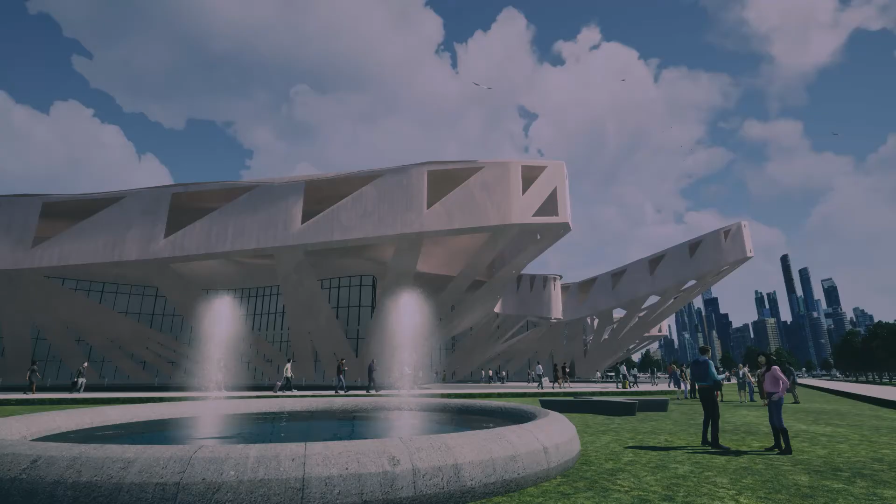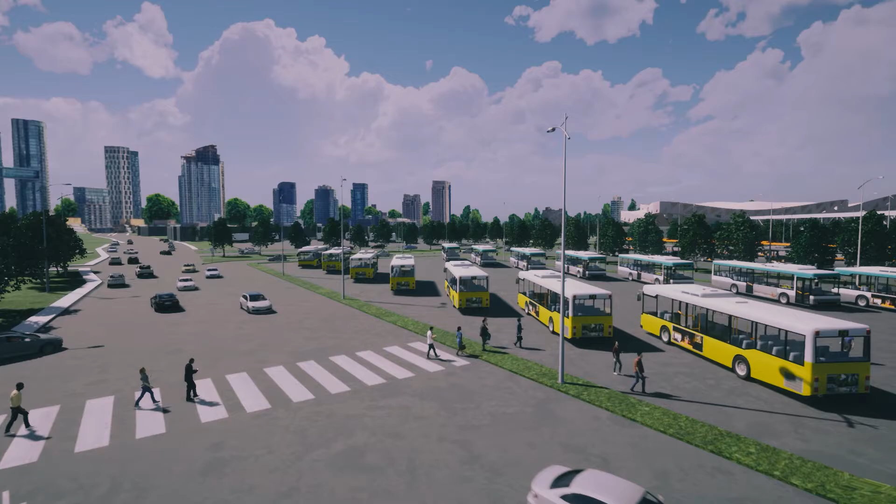Dagasa is designed and conceptualized as a seaport terminal, which prioritizes movement in design, focusing on how it can blur the boundaries between the sea and the city. This new seaport will serve as a multifunctional space, promoting the culture in the area, while it will also cater various activities for the public. The project's key goal is to develop the existing terminal, considering its efficiency and the overall design and planning aspects.

Batangas International Port is located in Barangay Santa Clara, Batangas City, which has a total area of 252,027 square meters. The existing location has wide access to different islands and provinces, particularly in the Calabarzon region of the Philippines. Site analysis is conducted to further understand the characteristics and charms of the site. This helps the designers to further understand and program the activities in and out of the structure with efficient movement of people and cargo in mind.

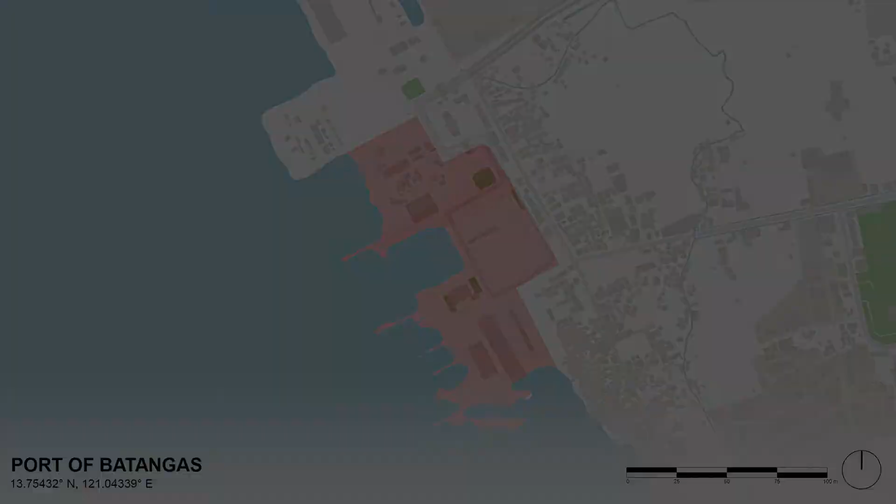The site is easily accessible from the major roads such as the National Highway Road and Diversion Road, which are both conveniently linked to the Star Tollway, being the main access road from Metro Manila and other South Luzon provinces, leading directly to the port area. It also has wide access to a variety of spaces wherein it is bounded with mostly residential properties and commercial spaces, and are also near local landmarks in the area.

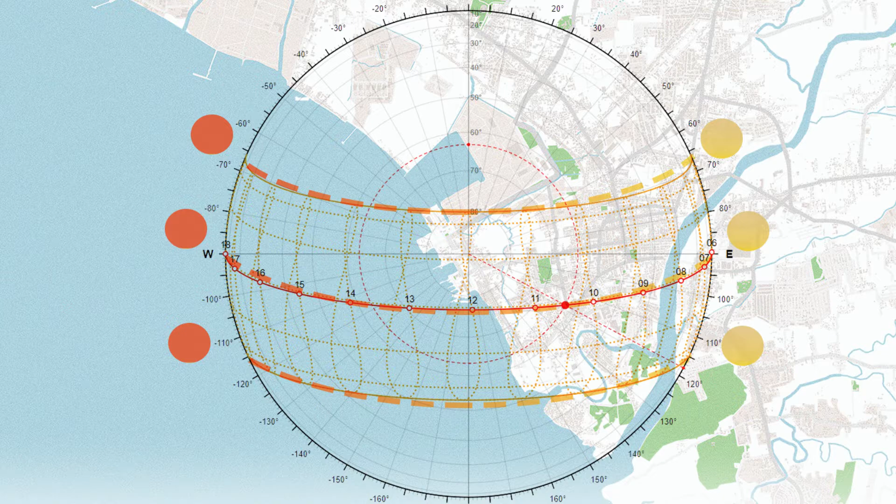The site traffic is also plotted, focusing on the pedestrian, cargo, and vehicular traffic within the existing Batangas port area. These help us in determining the existing movement of people and other elements present in the site for easier planning. Other analyses were made such as environmental analysis, plotting the sun and wind paths. Psychogeographic analysis was also conducted and plotted. The radius of the noise level around the site was also presented in the study for audio analysis within the site. These would be important in the latter part of the design phases to determine the flow of spaces within the Dagasa International Port. Strengths, weaknesses, opportunities, and threats were also thought of.

First, we start with the strengths of the site based on our analysis. The site is accessible to different provinces and has a wide access to public transportation and nearby terminals around the site. It is accessible to Batangas Port through Skyway, SLEX, Starlink, and Star. The Port of Batangas can help ease congestion at the Port of Manila, and it serves as an alternative international gateway for shippers based in Calabarzon. It is the country's largest domestic port in terms of passenger traffic, and it serves as the primary trade gateway between mainland Luzon and Mimaropa.

While acting as an important staging area for container-based domestic trade between Luzon, Visayas, and Mindanao. As for the weaknesses, first, the existing site and port has minimal commercial spaces on the port and has less spaces for waiting and boarding passengers. The site has less space for personnel and lacks access roads to the international ports due to traffic congestion. Truck ban alleviates traffic congestion, causing disruption in chain movements.

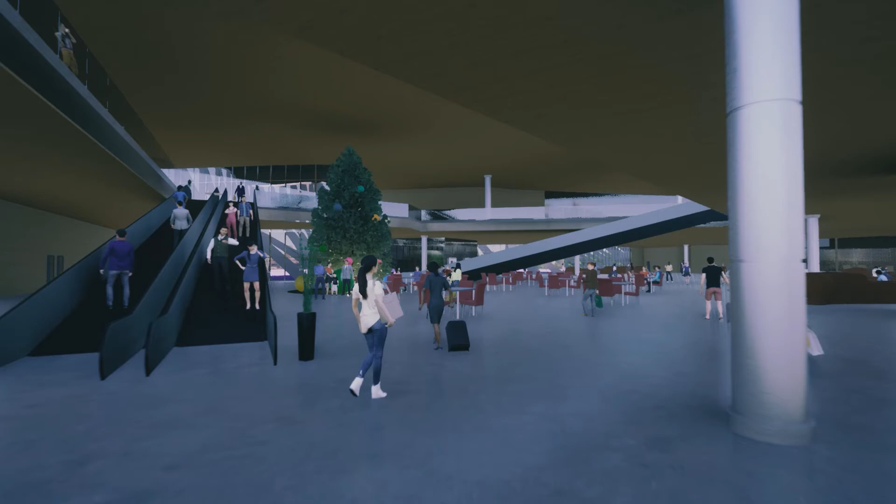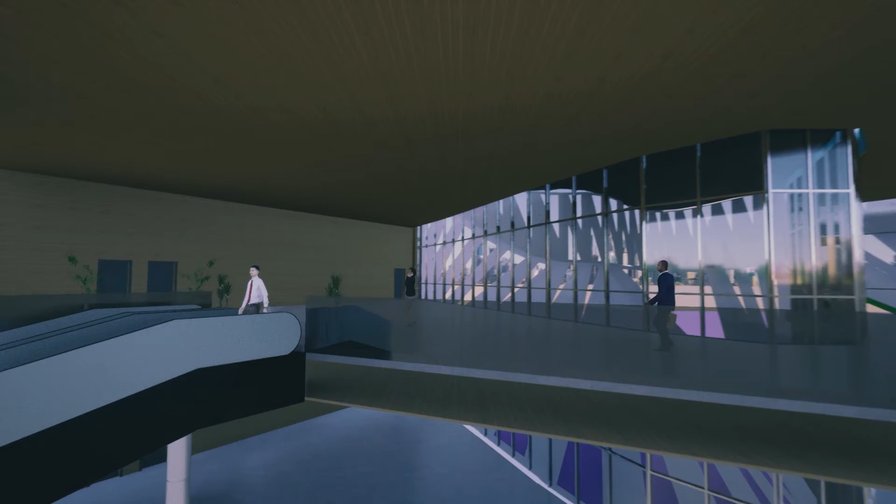Just like the Batangueño word, Dagasa, this is the fast-paced yet graceful movement, just like the movement of water. Our goal is to design and conceptualize a seaport which prioritizes movement and design through humans and automobiles or ships, etc. With this redesign proposal for Batangas Seaport, Dagasa's goal is to accommodate small and large vessels, introduce various spaces that promote culture in the area, areas accessible to everyone to rouse the interest of the people visiting the port, and address all the design considerations mentioned.

This project will focus on these four key objectives in order to develop the existing seaport infrastructure into a more globally competitive design terminal, considering its sustainability, connectivity, and convenience for the people. First, function.

To redesign the Batangas port and accommodate and introduce innovative spaces in the area through architecture. Second, character: utilize the advantage of the previous analysis in the Batangas port area. Third, experience: create an environment that enhances the experience true to the Batangas culture. Fourth, aesthetics: create a structure that is both unique yet faithfully local to the area's surroundings.

Our design objectives revolve around the redevelopment of the site in response to the new normal by providing more open spaces to promote safe distancing, reconnecting the sea to the neighboring towns by providing more public spaces and facilities at the port area, and using vernacular materials to promote the area.

To integrate a climate-responsive design, maximizing sun path and promoting natural lighting. Next, we plan to dedicate spaces for passengers and personnel by providing ample shades and commercial and even non-commercial spaces in the port.

Next, we introduce our design considerations, namely natural ventilation, health and safety abiding designs, accessible design considerations, environmental sustainability, and lastly the layout and composition of spaces within the new seaport of Batangas.

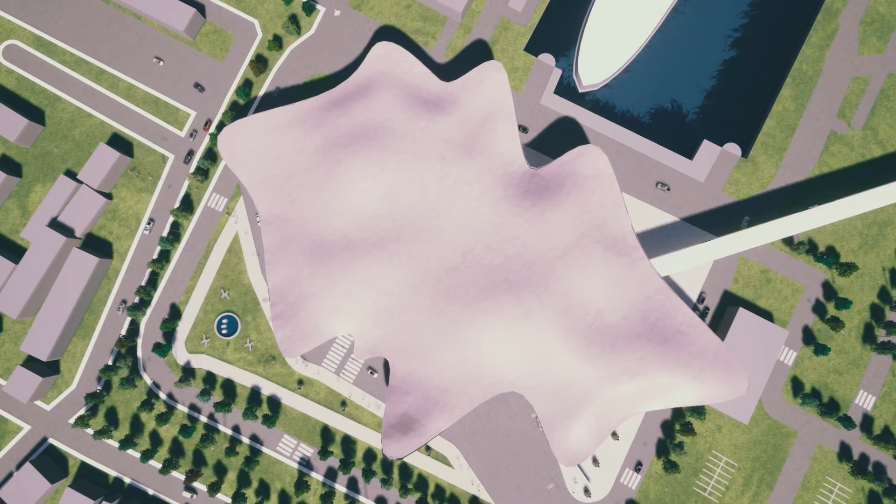The concept behind the Dagasa started with the idea of utilizing the site's soundscapes to strengthen the relationship between the people and their surroundings. The composition is based on the sound waves from the port's sea waves and its neighboring town, which provide a site-specific character to the design.

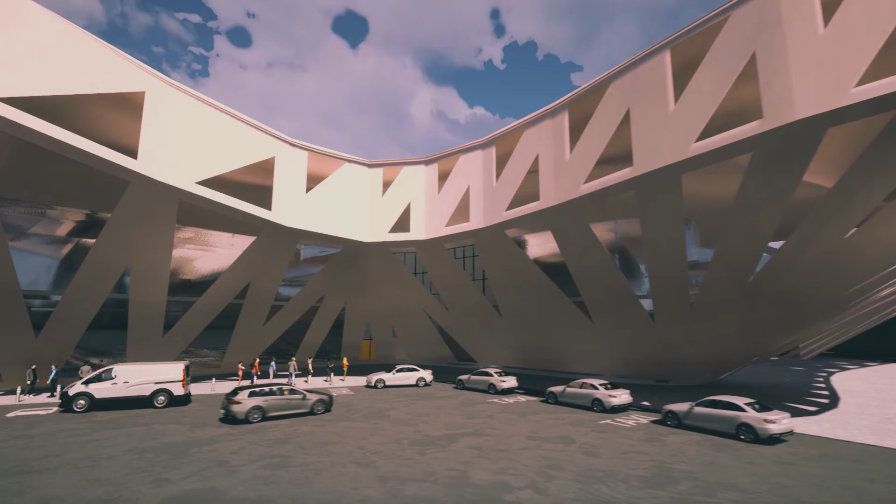With the idea of combining the morphologies, it allows the structure to reflect how the design can blur the boundaries between the sea and the city.

Photocatalytic concrete is used as part of the innovative materials to utilize in Dagasa International Port. According to research, this is a self-cleaning concrete material coated with titanium dioxide, which can help remove air pollutants while providing clean air in the town.

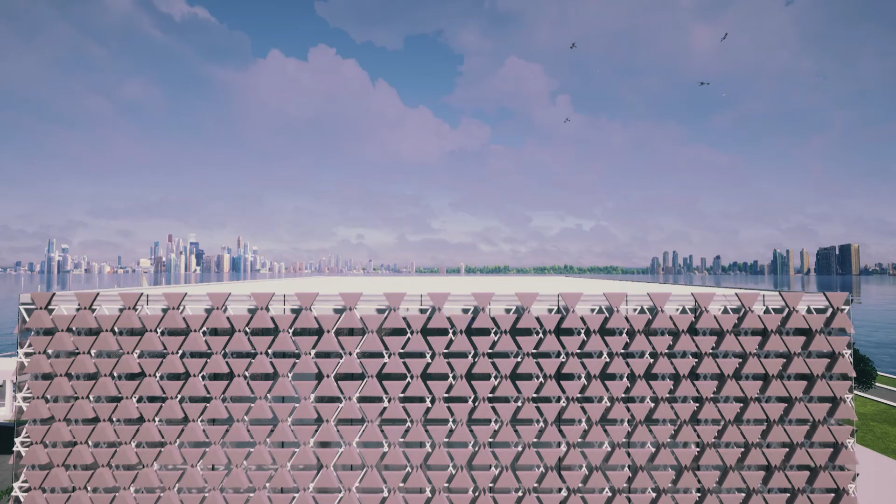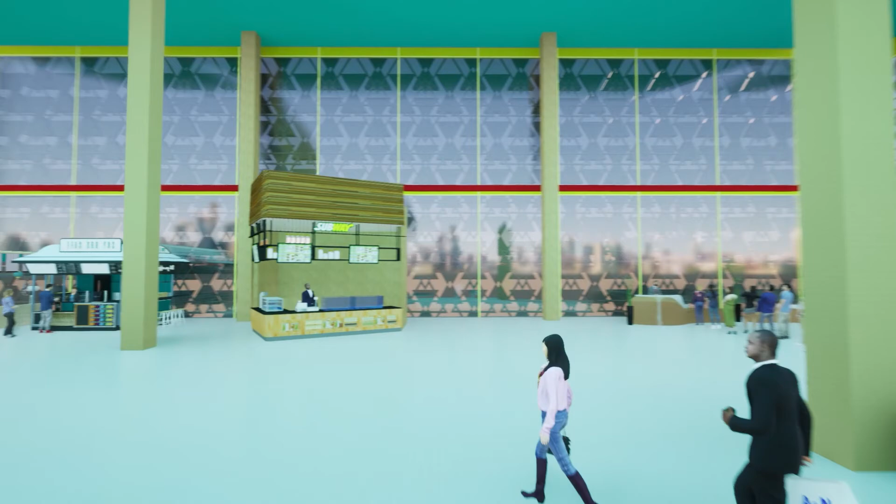We will also use fiber-reinforced polymer due to its high-strength materiality compared to traditional materials. It also has efficient characteristics such as corrosion resistance, UV resistance, and thermal mechanical properties. Fiber-reinforced polymer can also be used as a structural domain because of its capacity to withhold weight, and can be used as a structural member in retaining walls and bridge decks.

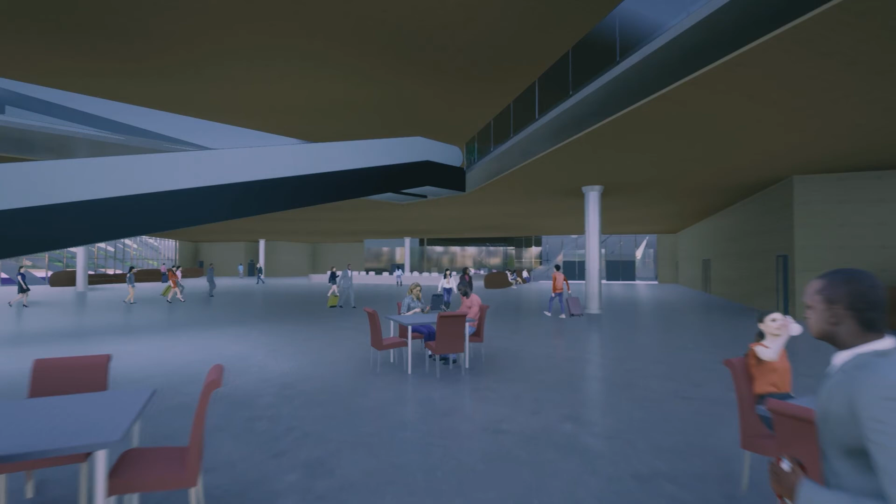To add character and texture with sensibility in our interiors, we will use sawali, a type of traditional woven split bamboo mats used as walls, paneling, or wall cladding in the Philippines. This promotes airflow when placed into the right spaces and use of vernacular materials.

And lastly, low-E glass, insulating and UV protection, and does not retain much condensation.

Focusing on the idea of the soundscapes, being a multi-layered single field recording could already bring a lot of context about the site. Integrating the site's soundscape to the composition, the form was conceptualized by combining the morphological structure of the sound waves from the sea and the city.

Incorporated with a series of curves representing the change in the wavelength of the sound waves, it also gives definition to the exteriority of the structure.

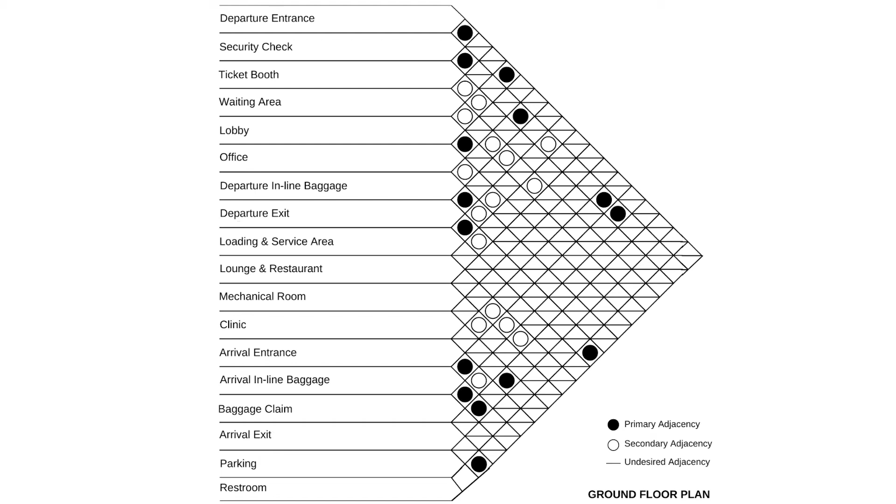Atelier A arrived at the classification of the required spaces, which are deemed suitable for the proposed Batangas port building, shown through a space matrix diagram. This diagram shows the primary, secondary, and undesired adjacency of the proposed spaces within the proposed Batangas port.

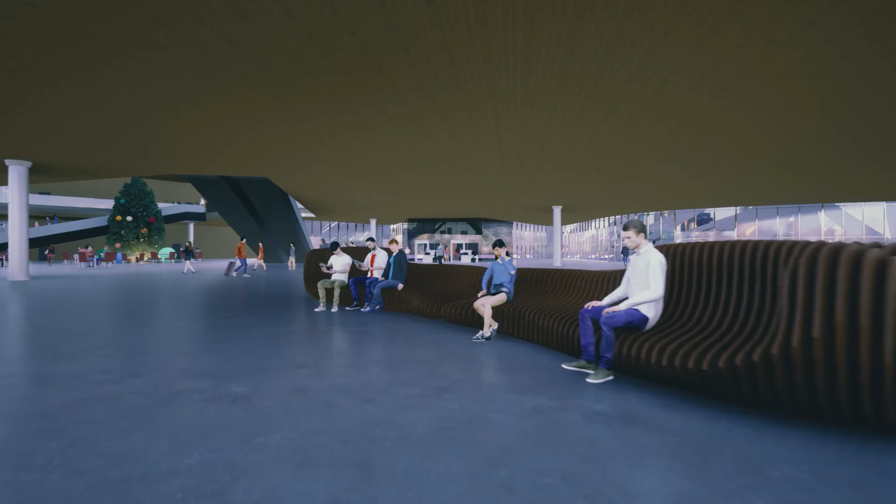The space matrix puts emphasis on the easy access of ingress and egress of passengers for the floor plan. This is to mitigate the possibility of contagious disease such as COVID-19 and to create an efficient foot traffic within the port area.

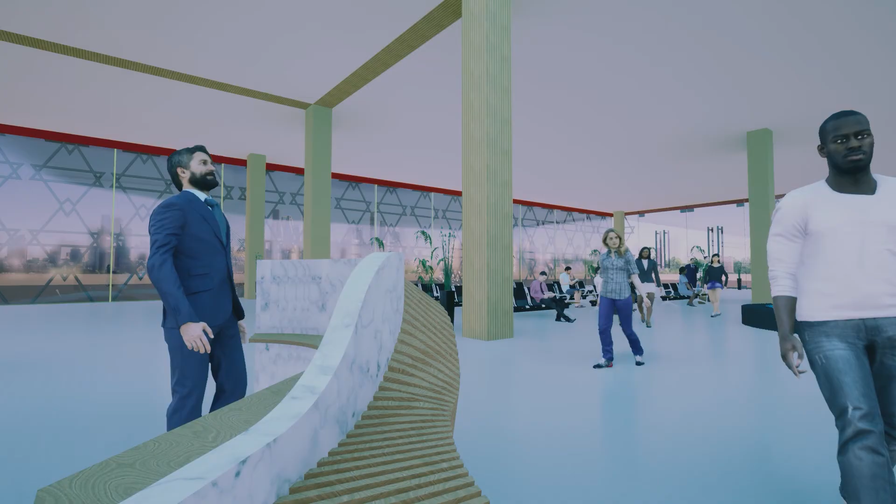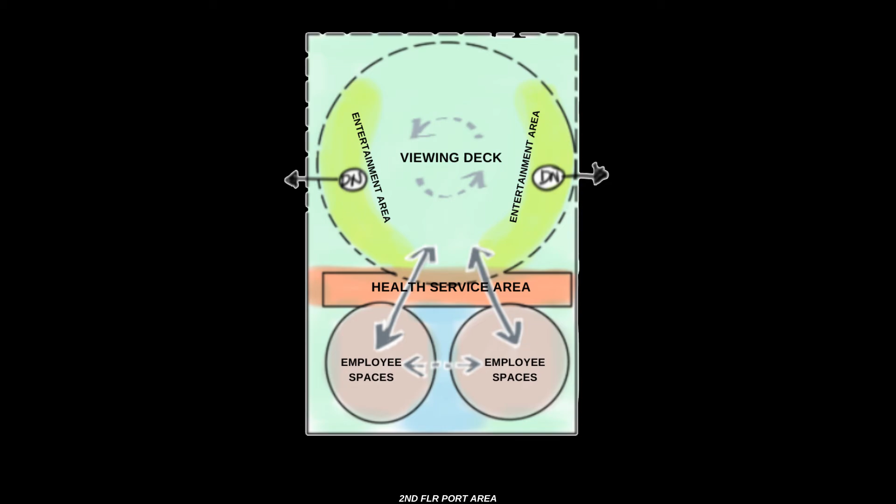Bubble diagrams are essential for the planners to determine the essential spaces needed for the proposal of the Batangas port. In this bubble diagram, the researchers illustrate the relationship between different spaces. This space planning gives opportunities for open and semi-open spaces to minimize contact and promote social safe distancing in compliance with the IATF guidelines. Other spaces would be further elaborated as the design phase progresses.

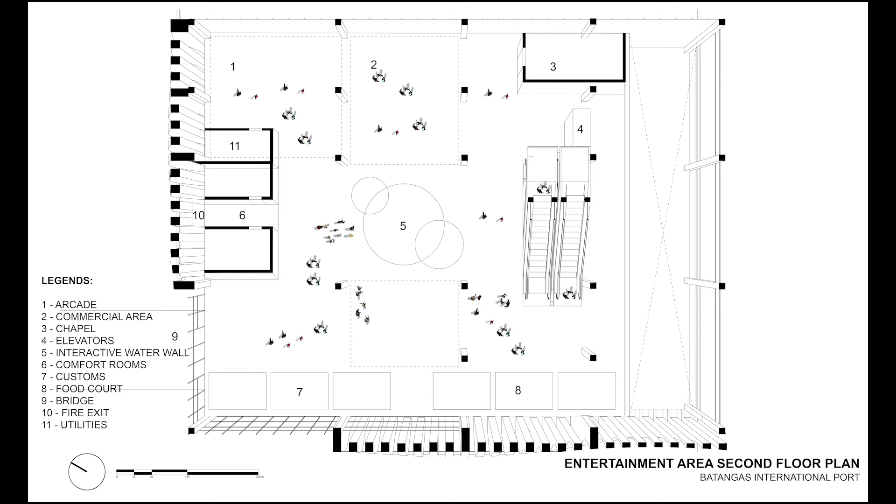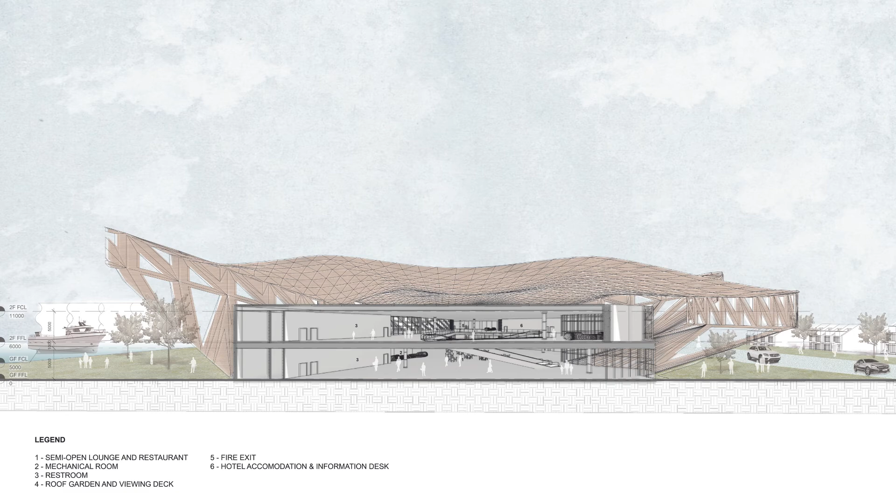The Dagasa port area is composed of 2 floors. For the ground floor, we have a total of 18 spaces dedicated to accommodate the boarding and unboarding passengers from the RORO area. One of the main features of the ground floor area is the semi-open lounge area for additional seating, and this area allows natural air to flow through inside the spaces of the Dagasa as part of our natural ventilation strategy.

Another main feature of the ground floor plan are the sanitation areas, strategically placed at entry points that have high exposure, adding ample open spaces. These are included in the new plans as part of the pandemic resilience strategies.

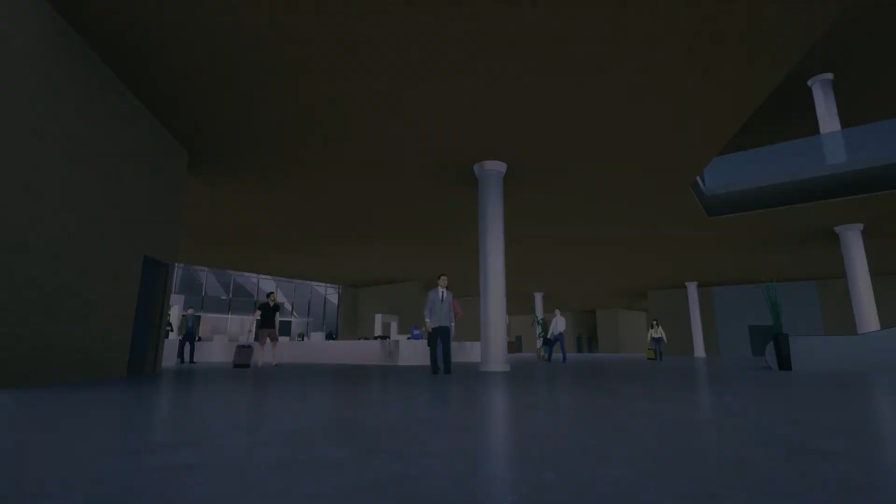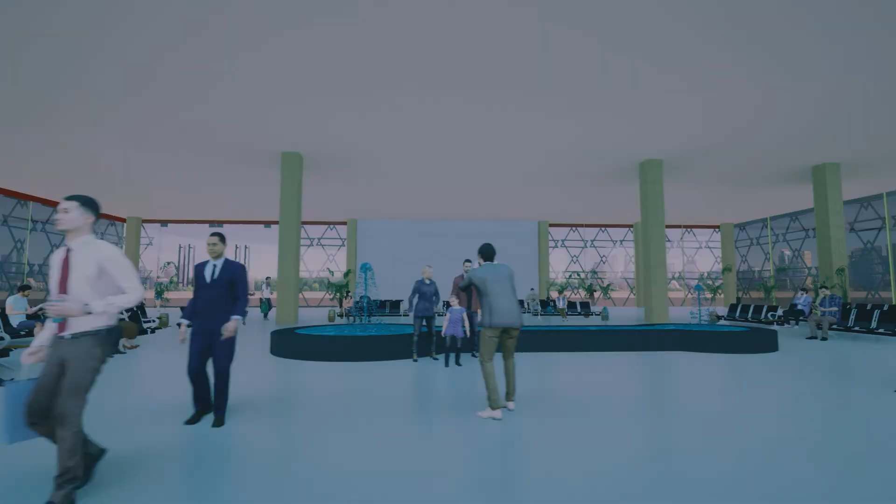Meanwhile, the Dagasa hotel and accommodations is connected to the second floor area of Dagasa International Port. It is composed of 3 floors: the ground terminal area, entertainment floor, and lastly the capsule hotel.

The Dagasa Hotel and Accommodation offers the capsule hotel, with the advantage that they are small and people put their belongings in lockers, which ensures that all rooms in the hotel remain fairly clean, which separates the Dagasa Hotel and Accommodations from the rest.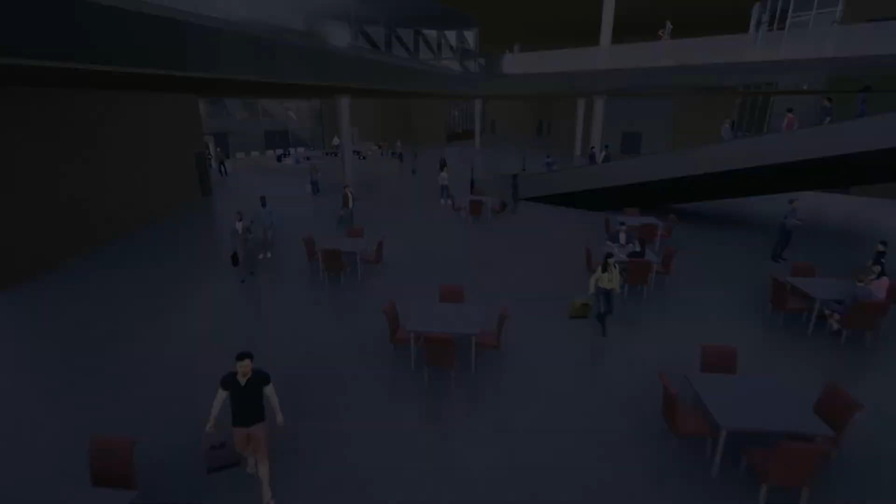All of the spaces and the floor plans were conceived under the requirements of the following: National Building Codes PD 1096, Fire Code of the Philippines RA 9514, the Philippine Green Building Code, Plumbing Code of the Philippines, IATF Guidelines, and lastly Batangas City Ordinances.

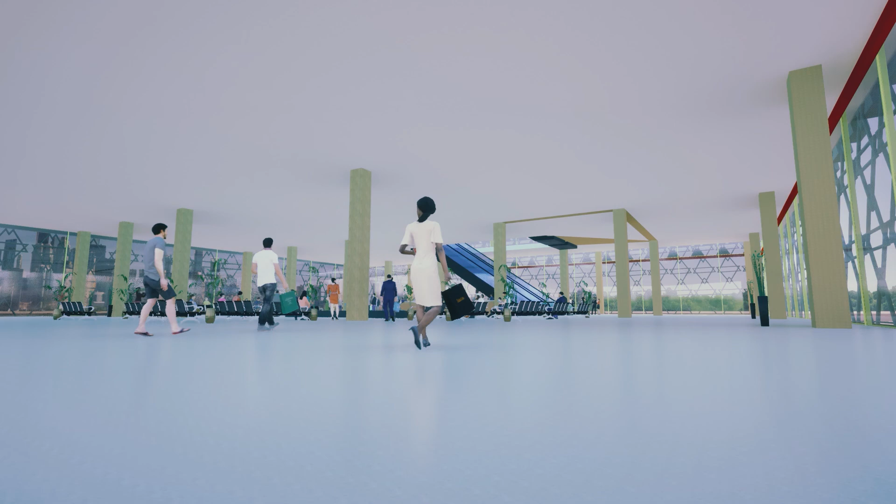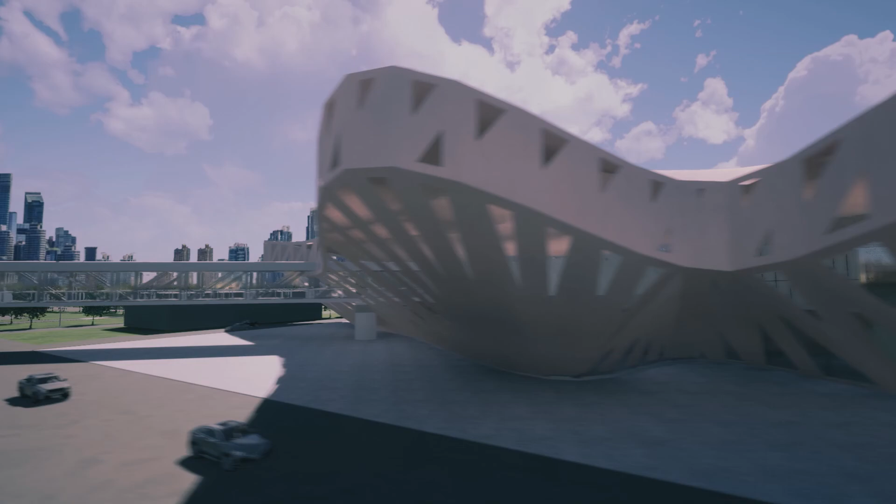Transportation planning is crucial anywhere in the world because it serves the area economically, socially, and improves quality of life for the people. We believe that by improving the transport system, starting by redesigning and rethinking the programs of our terminals, like our seaports for example, we are able to take the biggest step ahead in improving our nation as a whole, just like how we envision Dagasa, Batangas' new international port.